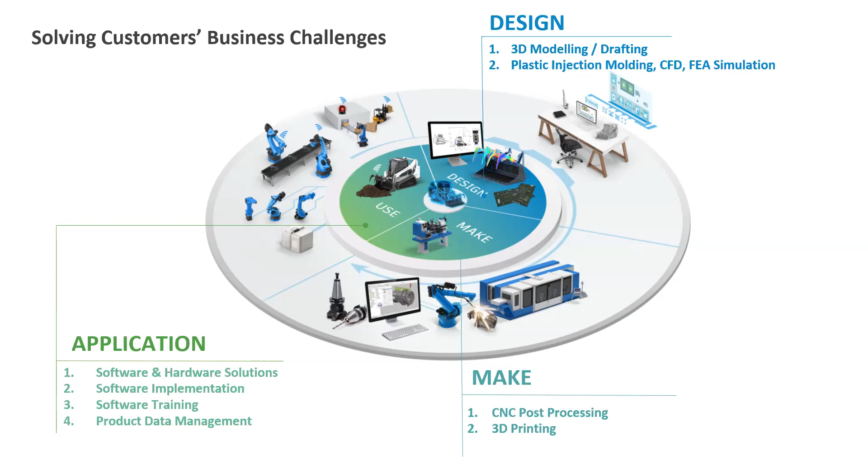So just to show our current clientele over the years, we have expanded, and they are from a wide variety of industries and segments. We have government agencies, institutes of higher learning, research institutes, oil and gas, semiconductor, electronics, plastic injection, and consumer products. This shows that we have been really offering value-driven end-to-end solutions where our customers have been valuing us.

And lastly, next slide please. I'll paste our contact info in the chat box, so you could just copy it accordingly. This is both our sales engineers', myself and Marcus, email contacts, and this is our company's email to show more range of courses and solutions that we provide.

So I'll hand over to our main guest speaker today, Mr. Samsul, he will be delivering the core of the content. Next to you. Okay, thank you. Thanks, thank you Marcus. Hi, good afternoon everyone, so let me share my slide first.

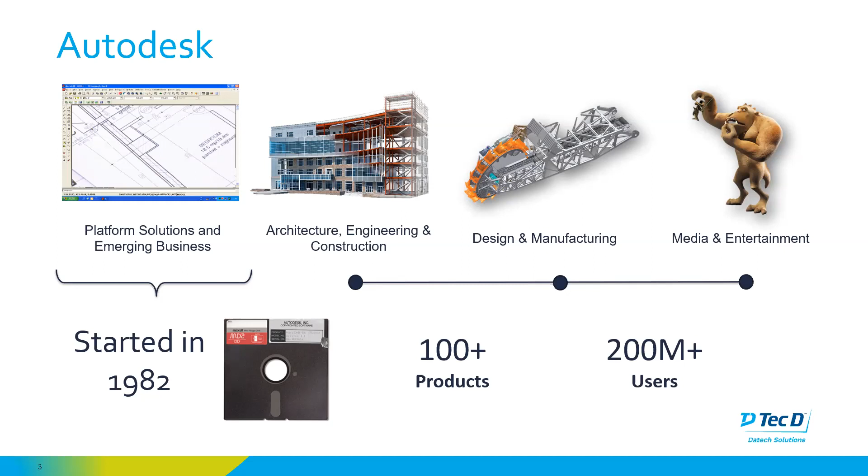Today we see fundamental disruptions in three main areas combining to create a seismic shift in the industry: changes in the means of production and how teams plan, design, create and operate infrastructure assets; changes in the nature of demand for resources; and changes in products as devices, equipment and systems deeply intertwine the physical and digital worlds.

Let's take a closer look. What are the industry challenges in the oil and gas or plant industries? Every business owner wants to win more business, be reliable and efficient, and deliver performance to clients and customers. We want to increase complexity of projects - the demand is increasing in complexity, and we have tight schedules, tight deadlines, and tight costs.

Coming into the new year 2022, material prices are going up, so we have to find out how we can cut costs and meet tight schedules and deadlines. Of course, to cut costs, we need a low cost plant design solution for plant design.

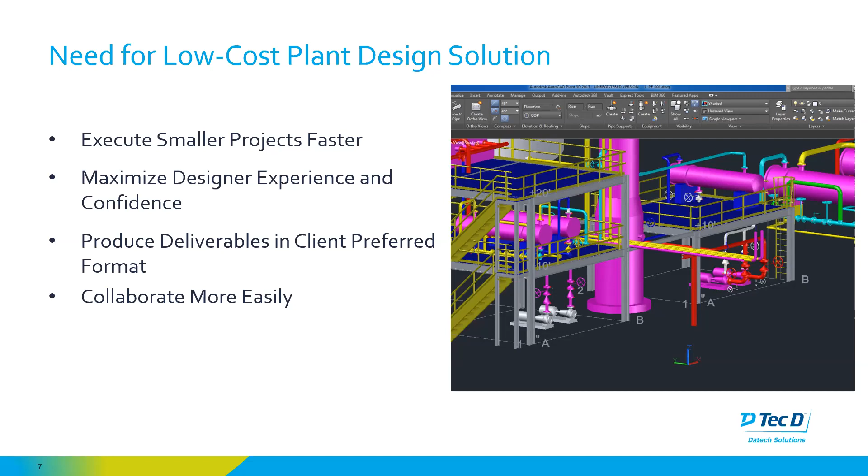This helps designers collaborate more easily. So what are the industry requirements in process plants?

In piping design, besides isogen, would they use piping for mechanical layout? If we provide DWG of piping in plan view etc., would they really use it practically? Sectioning for elevation - the requirements come from process simulation, the process flow diagram (PFD), PID drawings, equipment specification, and so on, all the way to project management. It covers basically everything in the process plant industry.

This is the typical engineering workflow for oil and gas or plant industry. First, we get the 3D or 2D drawing data from the customer or consultant. We start the project by getting all the documents and drawings, then go to project bidding and management, and then engineering. This engineering stage involves a lot of design work. After engineering, we go to procurement and then ERP integration.

In engineering, this is what we focus on - where we can save costs and where we can reduce risk.

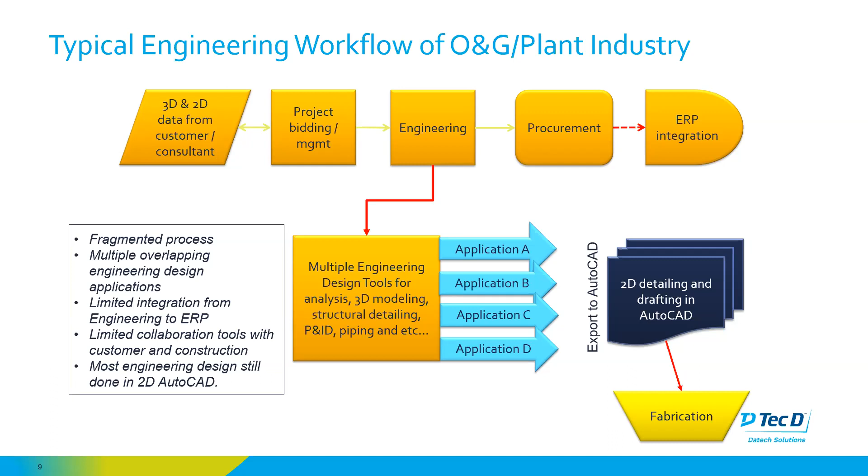So here is the Autodesk solution. The workflow is the same from 3D to project bidding and all, but during the engineering, we are providing only one platform - not one application, actually one platform, the Autodesk platform - to do the 2D drawing, PID, the Plant 3D piping drawing, visualizations, and also stress analysis applications. So under one platform, what is the good thing? It allows the integration between applications to be seamless, because it's all Autodesk, so the interoperability between each software is seamless. The overlapping application problems can be eliminated by using applications from the same platform.

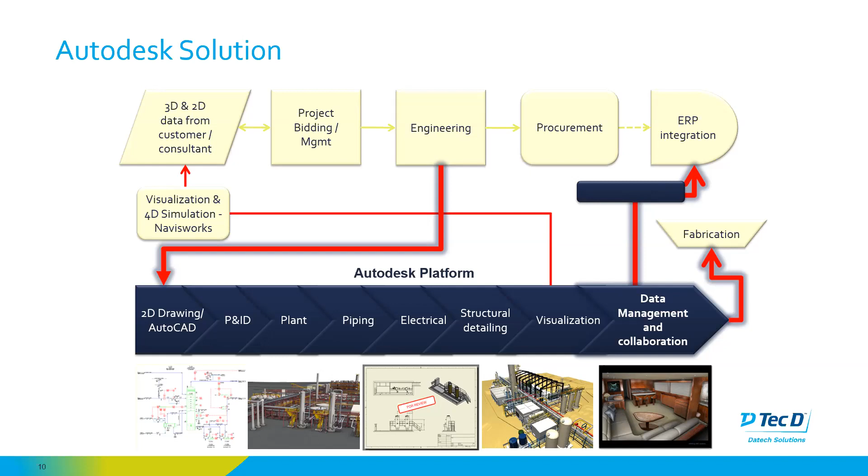So the Autodesk plant design workflow - in plant design, of course everyone needs the PID and drafting drawing, and then we move to Plant 3D. Some of them only stick with PID drawing, not Plant 3D. What's the problem? When you have only 2D PID drawing, you get all the information you want, but you cannot visualize how the plant will work - the height, the length, everything - because in PID it's purely on the spec. And then we go to Plant 3D.

In Plant 3D we have 3D piping and spool drawing, which is the isometric drawing. And then equipment and skid design - this can be done in Inventor, Autodesk Inventor Professional, and of course in Plant 3D itself you can create the equipment drawing as well. But the best way to do the skid drawing and equipment drawing is in Inventor Professional.

And then we go to structural design, structural designing and orthographic drawing - this can be done in Plant 3D. We also have other applications in Autodesk, such as Autodesk Structural Detailing, to do the structural design and detailing. Then for visualization, we go to project review, clash detection, and collaboration in Navisworks Manage. Then we do the map service with AutoCAD Map. So this is the Autodesk plant design workflow - we use all these applications within one platform, the Autodesk platform, to do the whole plant design workflow.

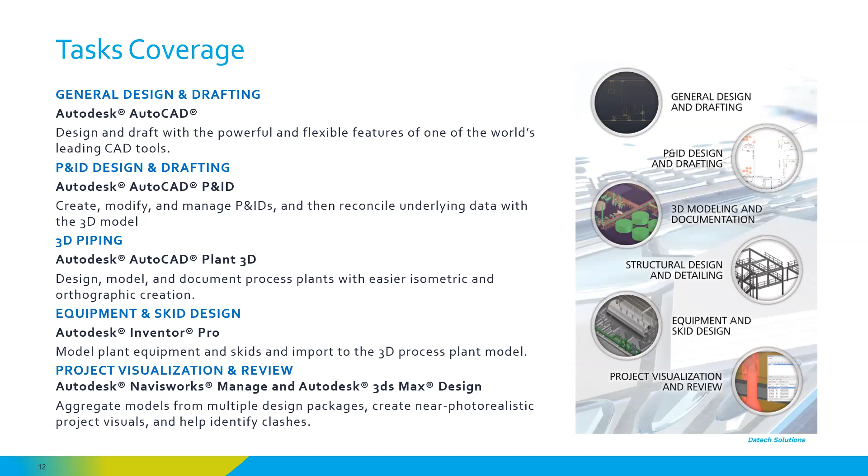So this is the integration between the software. You can see here that our goal is Plant 3D - we want to create a complete plant design in Plant 3D. So with Inventor, you can create a skid drawing and skid design, and export it into Plant 3D with .adsk. ADSK is the Autodesk exchange file - Autodesk has its own exchange file between applications, so it will open the drawing accurately in other applications. And then in AutoCAD Plant 3D, we can export it into DWG, open it in Navisworks, where you do the aggregation of multiple models - the structural, equipments, and pipings.

Then you can do a walkthrough, markups and project collaboration, clash check, and also simulation.

I'm not going to talk about Advance Steel and Revit right now, since it's out of scope for plant design. But a little introduction: Revit is for the AEC industry—architecture, engineering, and construction. But if it's suitable for you, you can use it for drawing and building design of your plant. Advance Steel is for steel detailing and structural detailing.

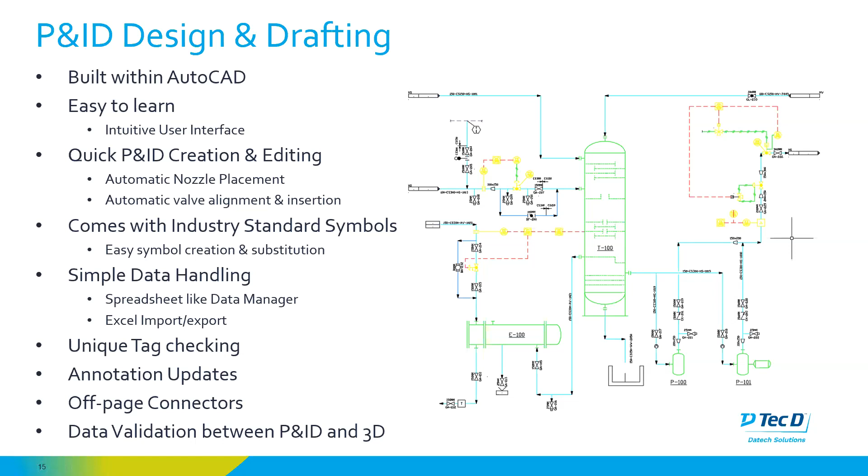So the workflow: we start from P&ID creation, then validate the rules, then go to change management using Excel export and import, and create a report from the management. Then we go from P&ID to piping, which is the 3D—from P&ID we can use it as reference to create our 3D piping.

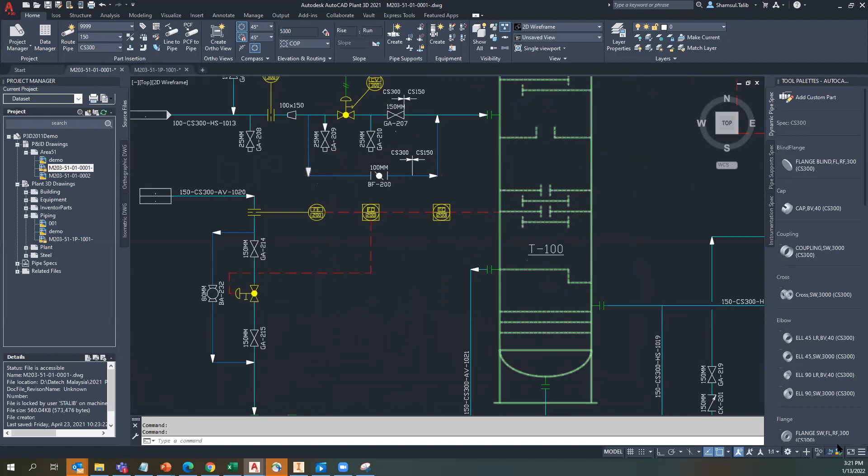So a little bit about P&ID—I'll show you a quick technical demo. This is AutoCAD P&ID. If you see here, it's similar to normal AutoCAD, but it has differences in the tool palettes.

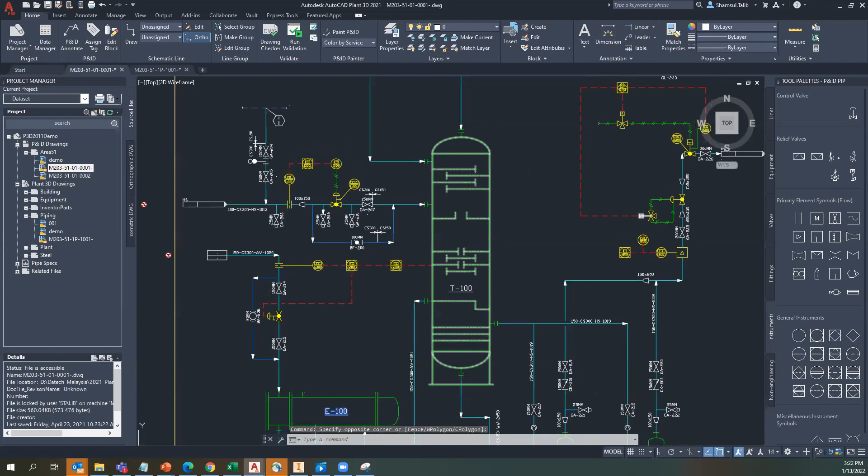So what's best about P&ID? Let me open an empty drawing. I'm going to create or place an equipment into my drawing. What I need to do is just go to—sorry, my Zoom is blocking my view, it's okay, sorry for that—then you can insert it.

For equipment, you just select from the tool palette, place the equipment, and it will show the assigned tag. This is the unique tag assignment—you put your number in, let's say 2222. This tag number is unique; you cannot repeat the number. So set it as the equipment tag, assign it, then put the annotation there. When you place a block or equipment, it immediately gets the annotation as well.

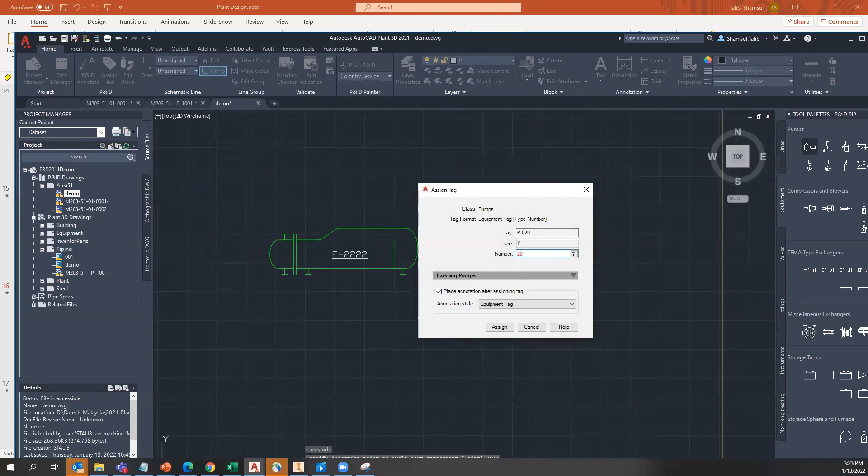When I add another part, for example I want to add a pump, I add a standard pump, say number 2022, and put the annotation down there. Now I want to connect the vessel to the pump, so I create the pipelines. Why do we use pipelines instead of normal lines in AutoCAD? Because the pipeline feature already has an arrow built in. Then when I connect it here—oops, sorry.

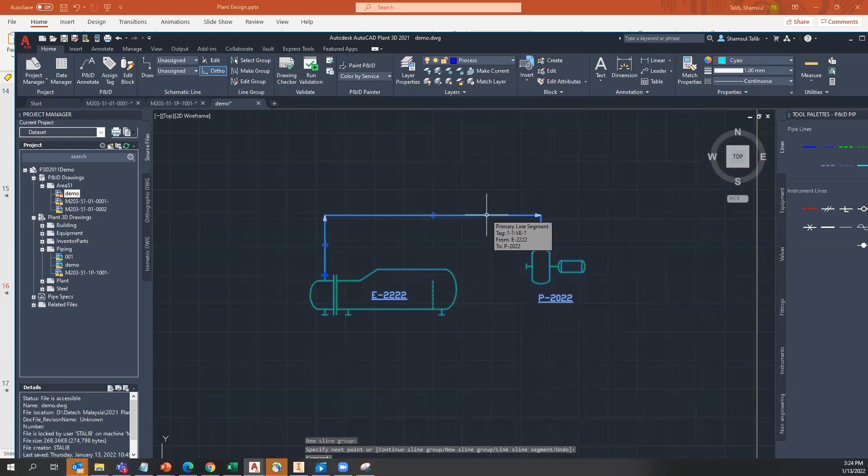When I connect the pipe, this is not a normal line - see, there's an assign tag. With the assign tag, you can directly set the size. For example, I'm going to set 150. The spec is carbon steel 150.

Pipeline group, you can choose from the various selections here - which type of pipeline group service you are drawing. For example, I'm going to show this general process, and then the group, line group. Same goes to the equipment.

You can also make the annotation directly when you assign the tag. So assign, then I put the tag down here.

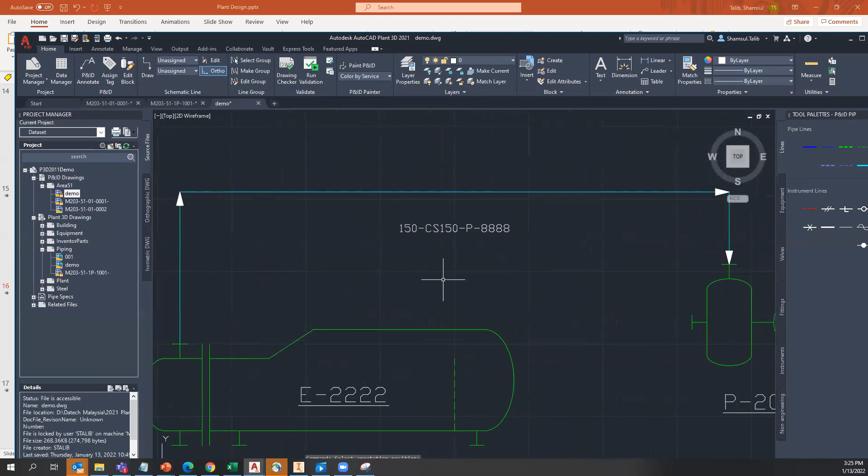Next I'm going to add some valves into the pipe. Now I can see here, this is my tag number. I have a 150 spec size, CS 150, general process P, and the line number.

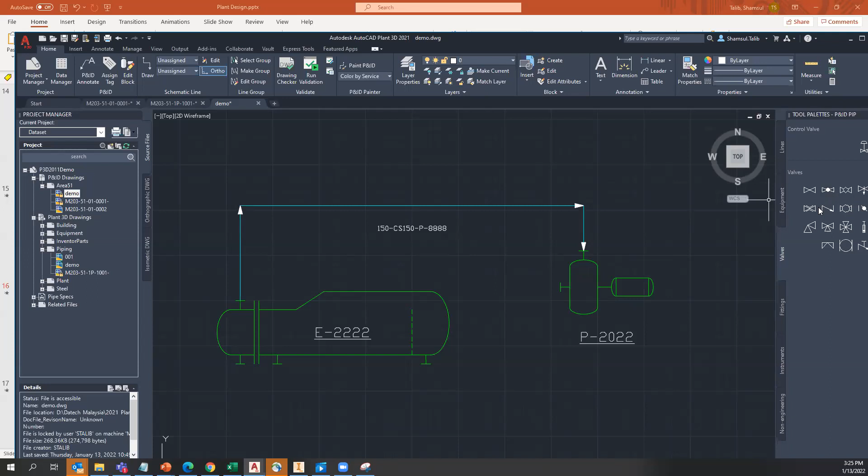When I add a valve, for example a gate valve, I just place it here. You see the line is continuous - when I place it, it automatically trims the line and puts in the tag. So you don't need to do double work to trim everything.

Even if you move it to the other place, the previous place is already continuous, and this one is already trimmed.

Next I'm going to add one more check valve here. It has the size automatically because it reads the pipe size.

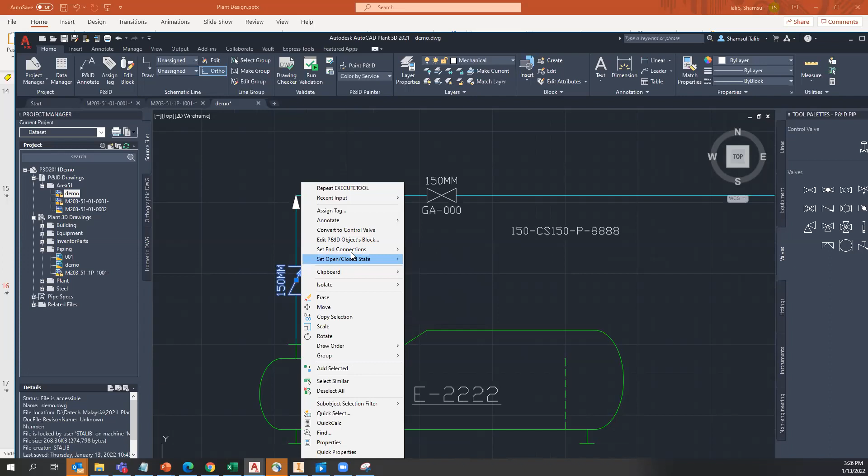I can even change the behavior of the valve - either normally open, normally closed, or others. So set end connection, and then I can change the flow of the valve just by clicking here.

If you wanted to change the valve type, just click the button here because it's already preset and provided by Autodesk. Then you can choose which valve type you want to use. Let's say I'm going to change to ball valve - it's easy, it's direct.

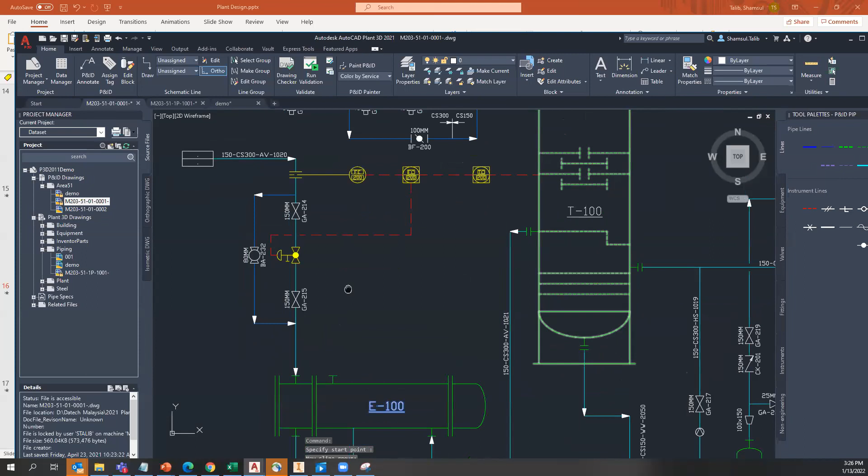I'll do a little more example here, adding more valves. When I connect this vessel to this tank, I just click here and then click to the tank. What happens is when it connects to the tank, it automatically adds a nozzle, because logically every pipeline that connects to the tank should connect to a nozzle.

Also, the overlapping lines or overlapping pipe will be trimmed as well. So that's P&ID - everything you draw inside your P&ID design.

You can get all the information, the table, the BOM list, the part list, inside the data manager. You can filter it by engineering items - either you want only equipment, only pumps, only tanks, or the whole engineering items report or BOM list.

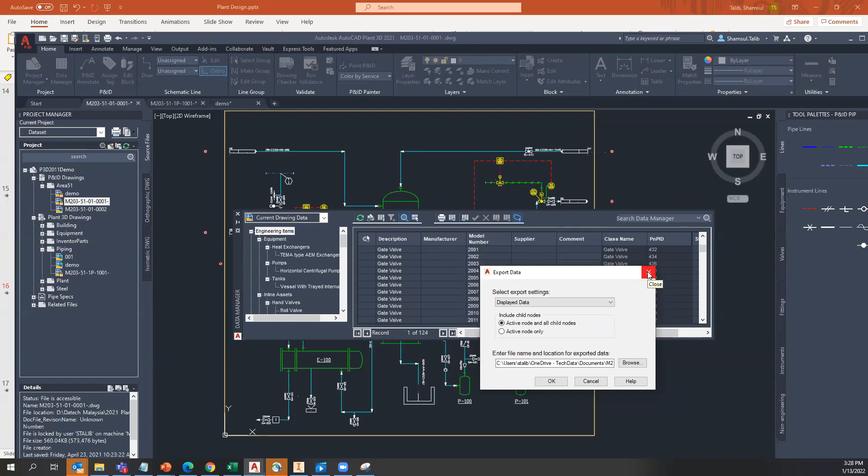These engineering items in the data manager can be exported into an Excel file - select where you want to save it and save. When you save it into Excel, any changes you've done in the Excel file can be re-imported and it will synchronize the file.

For example, you add supplier name, comment name here. Let's say the designer doesn't know the supplier or manufacturer name, so they export it to Excel and send it to procurement. Procurement fills up everything and sends it back to the designer, then you can update it in your drawings.

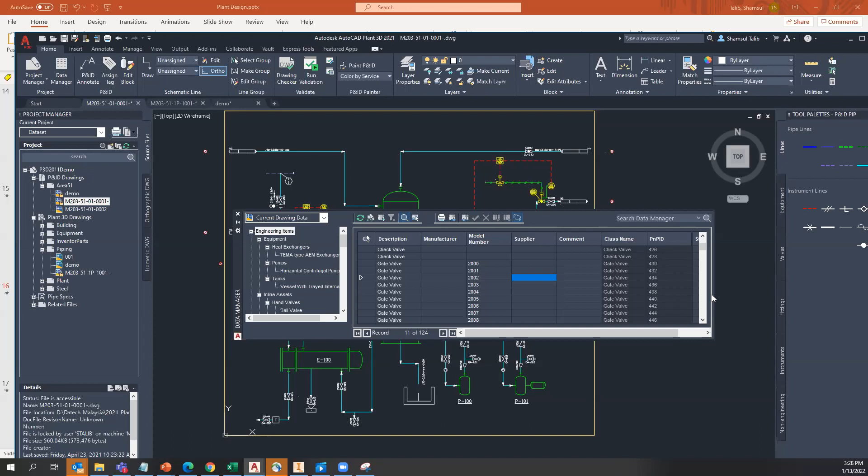When you open here, there's a lot of parts, and you don't know which one is which - for example, the gate valve 2001, you don't know where it's located in the drawing. So what you do is click the gate valve and click visualize, and it will show the location, highlighting each valve.

Same goes for the pump - what else can I show? Assume nozzles, this one - I just click the item. Oh, this one is assumed, it's not available here. Let's say this one - E100 is here. So it's easy for you to navigate throughout your drawing.

So this is about PNID. On the left here we have the project files - every drawing created in this project will be stored in one folder. That makes your project data management easier - it will not be stored in different places because the project cannot read it otherwise. It will show an error that it cannot read the file outside of the project folder.

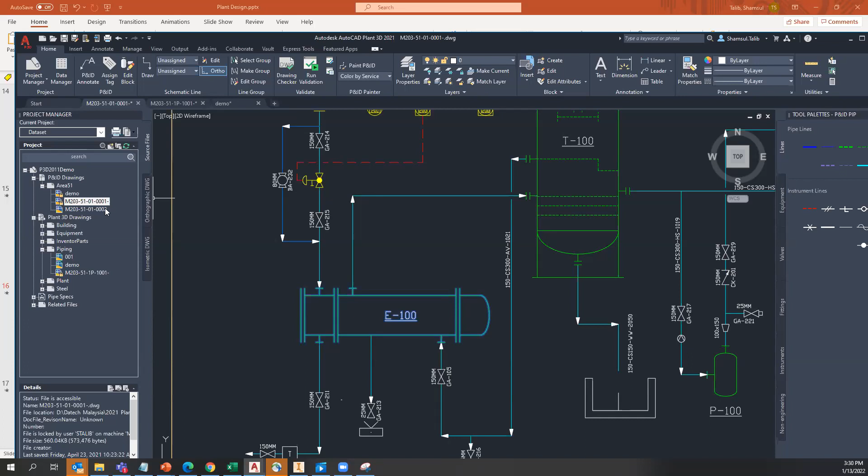From the PNID, the line list - this is not only the tag. This tag will be useful during the piping, the 3D piping creation later. You have already determined everything in the pipeline, then you can use this pipeline in your 3D piping creation. That's about the PNID, you can explore more later, but that's not all - that's what I'm going to show you right now.

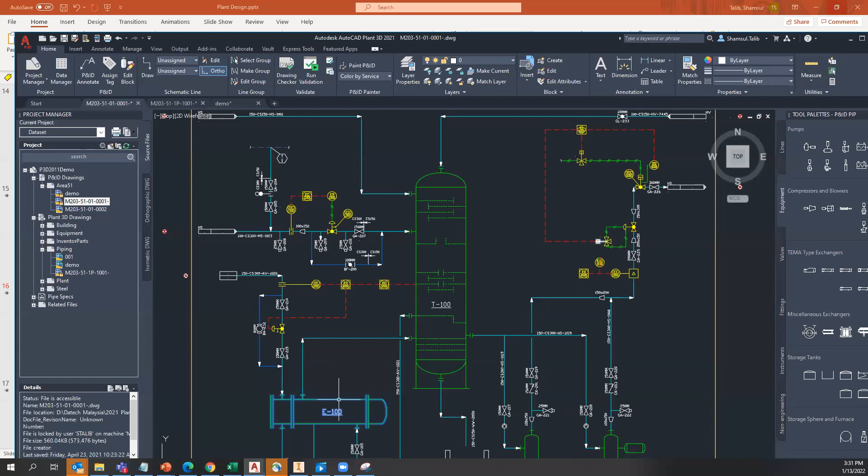So I'm going to move to the skid drawing - that's the 3D drawing, sorry. Okay, so this is the PNID.

Next is the P&ID to piping design workflow. This is the P&ID line list that I just mentioned earlier - the pipeline tag is not just a tag, it will be useful. So in Plant 3D, you will have the P&ID line list. This is for you to get the reference to do the 3D piping, so that you will not miss anything, or get the wrong line number during the 3D creation.

And then we go to the 3D drawing, which is the spec-driven piping, because all the piping created in Plant 3D is spec-driven. Then we go to the GA general arrangement drawing, then we go to clash checks.

From the orthographic drawing, the GA drawings, then we go to clash check using Navisworks or visualization, so that we can create the isometrics for construction. This is the most important thing needed for construction, because these are the final drawings for construction. So we do PID, Plant 3D, orthographic, and then finally we need the isometric drawings.

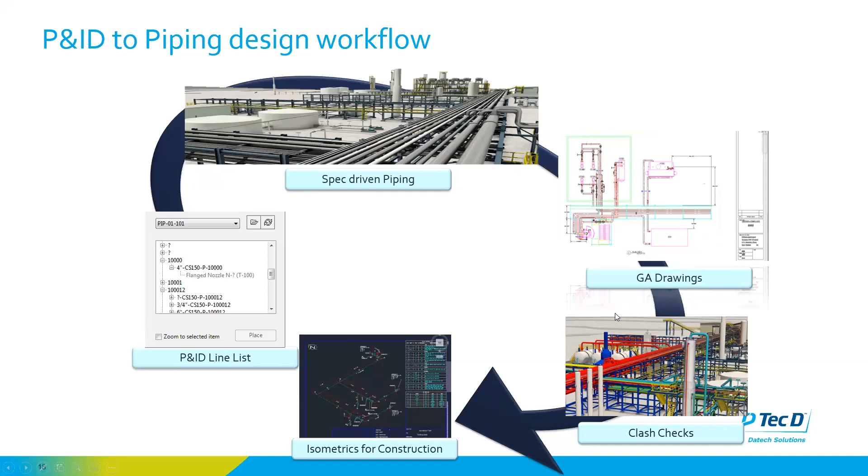So the structural modeling - AutoCAD Plant 3D also has the structure creation feature, because you can create structural modeling faster with all the structure standard catalogs available in Plant 3D. There are a lot of types of stairs available for stair creation, the platforms, as well as the ladders. This structure drawing created in Plant 3D can be exported to other applications for steel detailing or steel analysis, via the SDNF, which is the steel detailing neutral file.

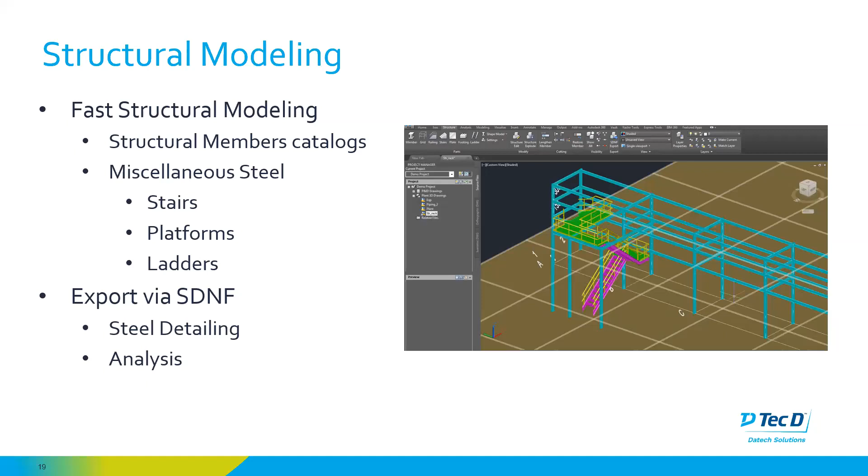Next is the equipment design. A powerful tool that Autodesk provides for part and assembly drawing is Autodesk Inventor. So what are the benefits that plant designers and equipment suppliers can get with Inventor? For plant designers, you can work better with the equipment drawings from the supplier. You can use their design data from suppliers directly and efficiently if the design data is using Inventor as well. The most important thing is to reduce plant design error possibilities and also react faster to any design changes.

I will show you a short video of how this equipment design change can be done in a few seconds. So for the supplier, you can take full advantage.

You can design the equipment, taking full advantage of a highly efficient mechanical CAD system. You can design the equipment in Plant 3D itself, but of course normally the piping designer doesn't do the equipment design, right? So normally we get the 3D drawing from the supplier for the equipment design. The file format you got from the supplier needs to be brought into the drawing, so you can convert it into Autodesk Inventor and then import it into Autodesk Plant 3D.

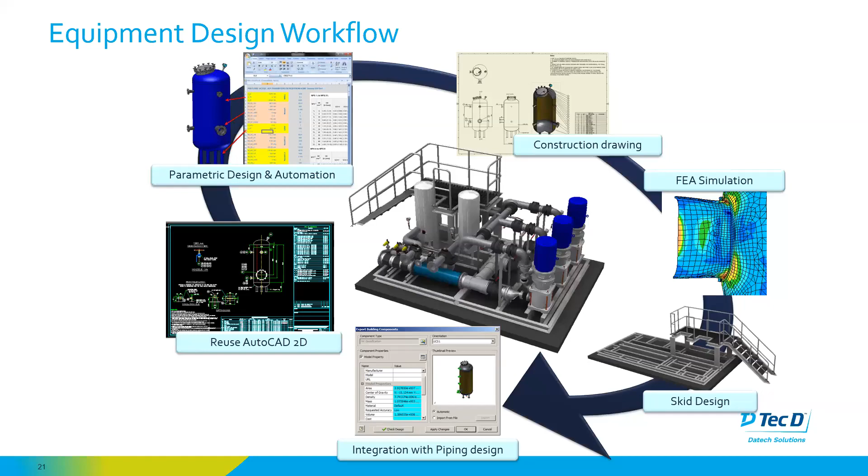And then we go to the skid design - we create a platform, put all the materials, put all the equipment and connections, and then we integrate it with the piping design. This is the equipment design workflow, and this is why I said earlier that the designer can react faster.

That means you don't need to do every part modification. What you need to do is just change the size of the vessel. One click, one change, everything is changed as well, so you don't have to do double or triple work. Of course, this comes with a few settings that you need to configure beforehand, but it's very simple to configure.

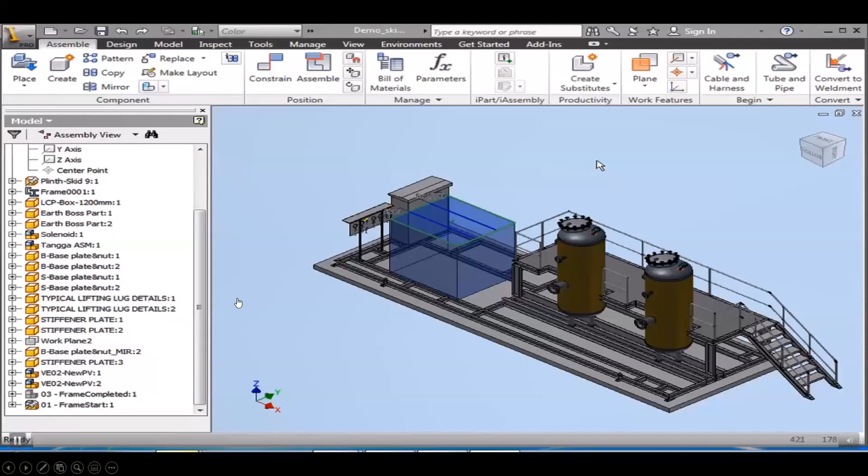So for skid design, the frame design, frame analysis, and automated material takeoff can be done in Autodesk Inventor. You can create the skid design accurately with the material library available. The material library in Inventor allows you to choose from various types of standards or families. You can easily design the frame by just choosing what type of frame you need, and connect each frame with the connection setting.

So the structure created in Inventor, of course, needs to be analyzed, because you don't know the strength of your design structure. So once the design of the structure is completed, then you can run it.

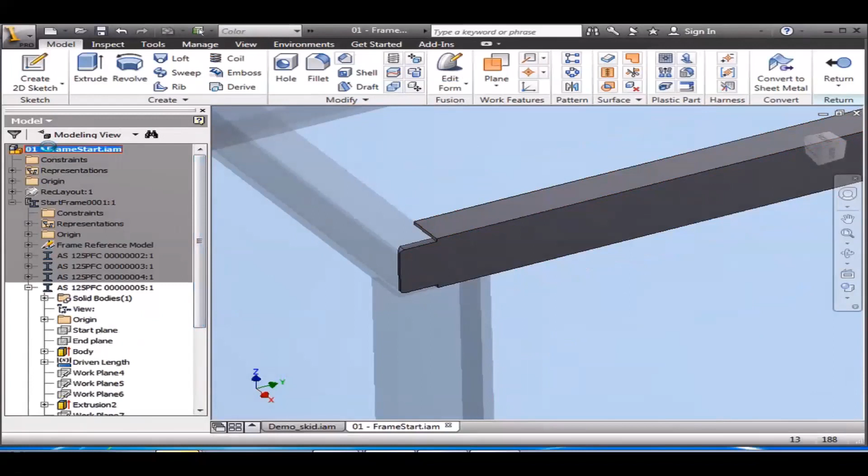This is the connection setting. You can set the connection, then run the simulation, the static or modal analysis. Choose which beam properties, apply the stress, apply the load, and then you can run the simulation.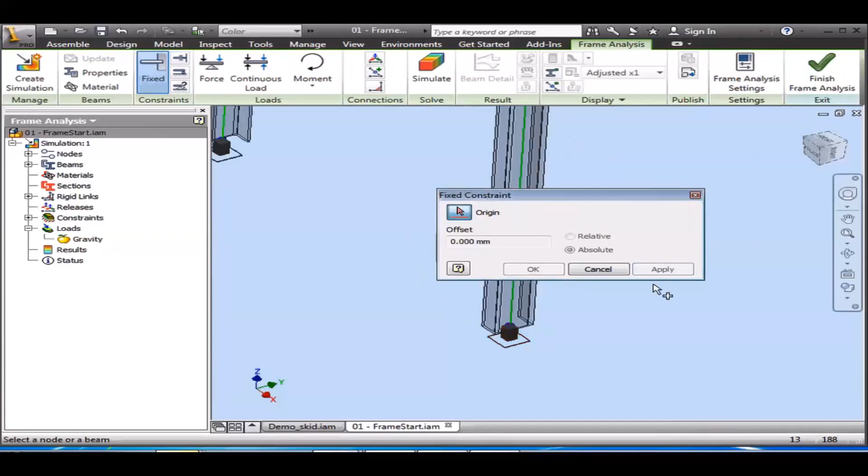So once the design is confirmed, when you've already run the simulation and got the approval that the design is strong enough, then you can proceed with the shop drawing, which is the orthographic drawing, of course.

So I'm skipping a bit. This is the orthographic drawing, the shop drawing, to send to the fabricators to fabricate the structure.

So next is 3D piping in AutoCAD Plant 3D. We do the skid design in Inventor, and then do the 3D piping in Plant 3D. Why do we do the skid design or equipment design in Inventor? Because Inventor is a specialized tool specifically for part design, for skid design, so that's why we don't do it in AutoCAD Plant 3D. In Plant 3D you can build the structure yourself, but there's no simulation test. If you need simulation test or stress analysis, you have to export it into other applications such as Autodesk Nastran, or go back to Inventor to do the stress analysis.

So in 3D piping, the piping creation in Plant 3D is spec driven. It all depends on the spec you choose. You will always attach to the spec when creating the piping, so that you will not miss or mistake the piping between specs. The piping modeling is pretty easy, and editing or modifying the drawing is also easy. The automated pipe routing feature helps you with the designing ideas.

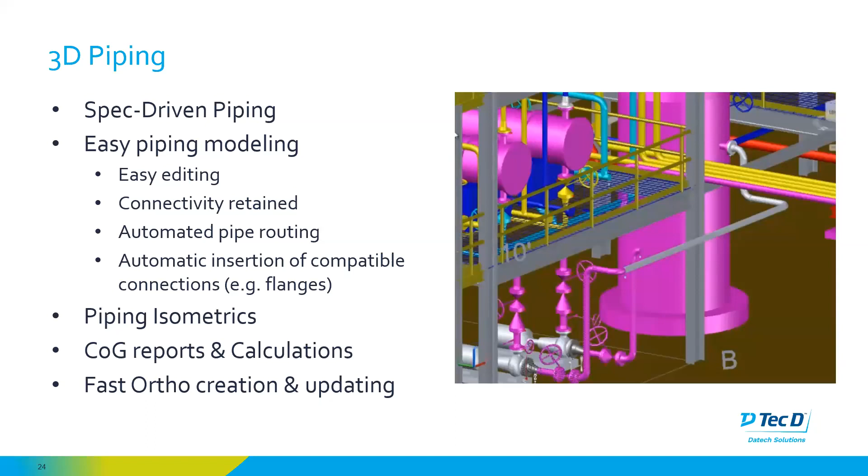And then a spool and isometric drawing can also be created with all the BOM lists and all the information needed. So this is an example of 3D piping videos. I think I'll show you a little demo on Autodesk Plant 3D and Inventor.

All right, first let's go back to Inventor. So this is the skid drawing that I have created earlier. This file can be exported to AutoCAD Plant 3D. In the environment, we have BIM Content, and with BIM Content we can export building components. What I've already done here is export it into a .adsk file, which is the Autodesk Exchange file.

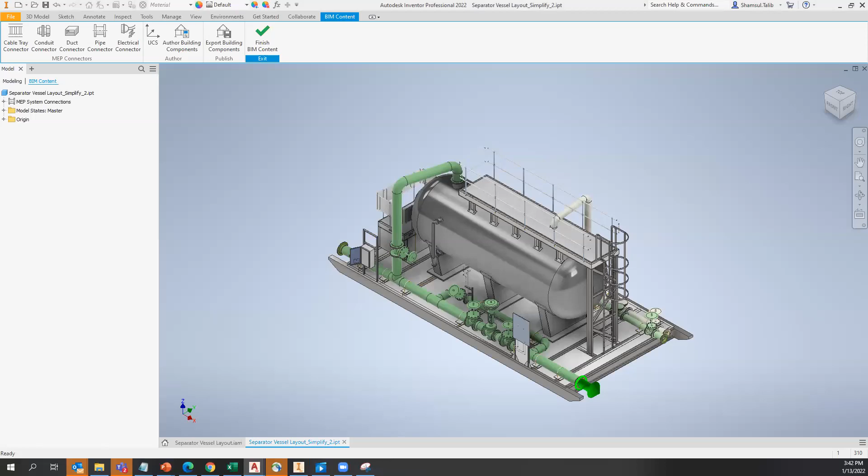Then when I export it, I save it as an ADSK file, and I can open and import it in Plant 3D. So this is in Inventor, from Inventor, and then I go to Plant 3D. For example, this one - with a few clicks, I can already import the skid design file into my Plant 3D drawing. Let me change the environment first.

Okay, 3D piping. There are multiple options you can choose for the tool palettes and for the environment. There's 3D piping, P&ID PIP, or you can use the ISO standard, ISA standard, or DIN. You can choose between these standards.

So in 3D piping, what I'm going to do is import the equipment from Inventor. I'll convert the Inventor equipment, choose import, then choose the part I already created earlier, open it, and place it into the drawing. I think I chose the wrong one because that one is pretty big.

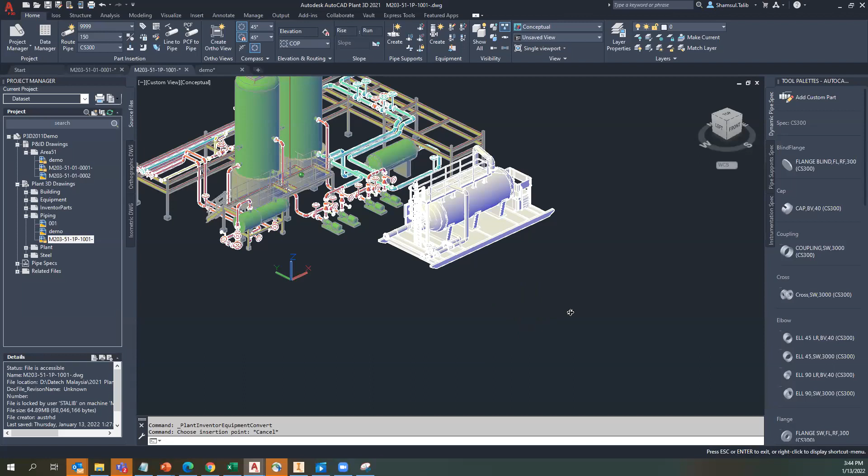In Inventor, before you export it into a .adsk file, you can simplify the drawing. That means smaller details like screws and nuts aren't included, because you don't need that in Plant 3D. All those small parts are only needed in Inventor and by the manufacturer, not in Plant 3D. So we can simplify the drawing and put it into Plant 3D to do the drawing better and simpler.

So on the equipment in Plant 3D, you can see these are actually the XREFs, the external references, that different disciplines create separately. So what we do is get the equipment drawing and the structure drawing, and combine them into one drawing.

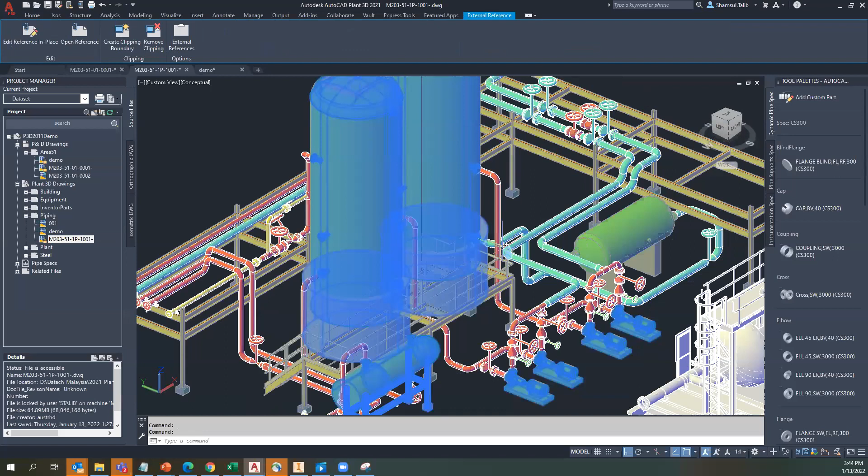In the piping drawing, since the final drawing is normally either the piping drawing or the plan drawing, the piping drawing will need the equipment and also the structure, because how do you do the piping drawing without the equipment? How do you connect it, right?

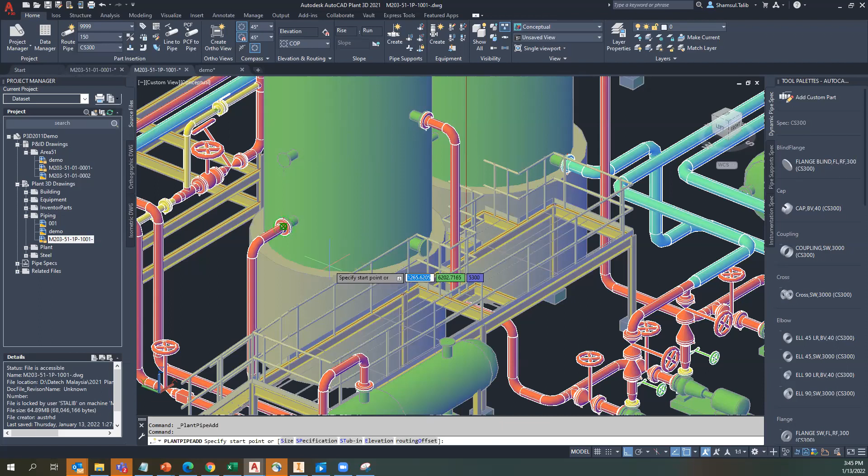So here's the 3D piping creation. For example, this is the spec, the CS300 available here. As you can see, there's a spec editor where you can create your own spec. For this, I'm using CS300, and I'm going to route a pipe from a vessel to a tank.

Oops, got the wrong spec. Sorry. Okay, coming back to the skid design I just imported - when you import the skid design, it also reads the connections on the drawing. This connection was created in Inventor, but once you import it into Plant 3D, the connection is already there.

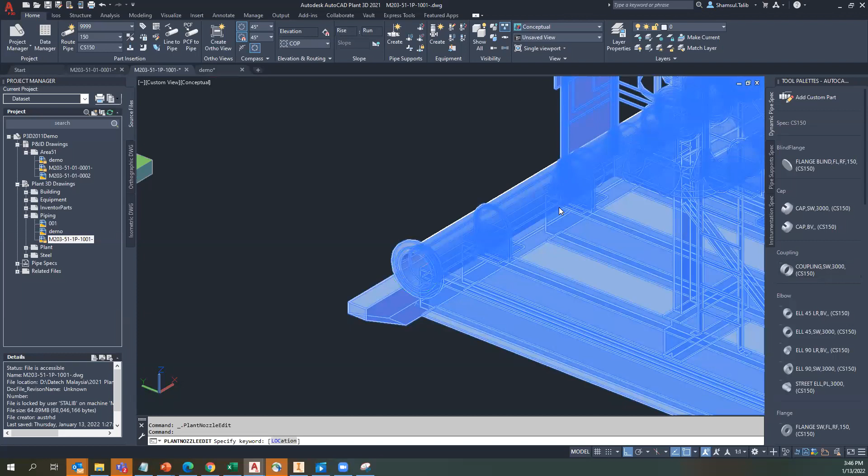So what you need to do is just select the suitable nozzle for that connection, and then you can already create the pipe.

Oops, guess I need to re-import it - there was some error I made earlier, sorry for that. I'll reopen the drawing first.

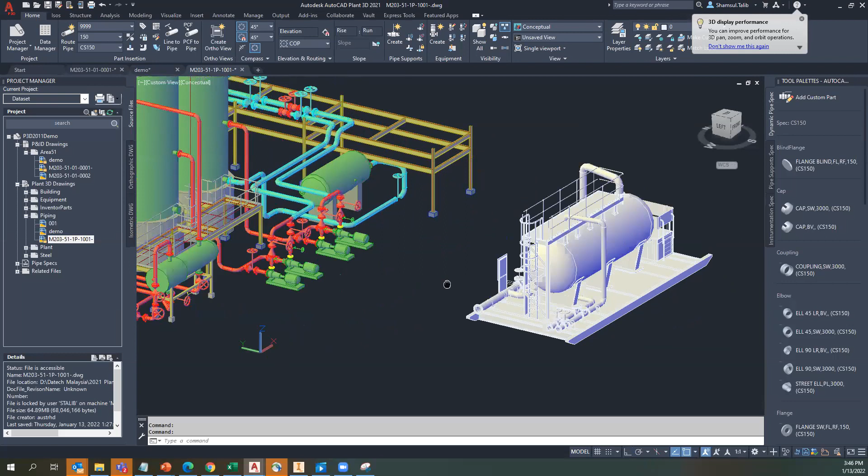So, for example, I need to reconfigure it - the zoom, or you can toggle it here. Then you can see the properties. So when you select it, you can change the properties of the nozzle.

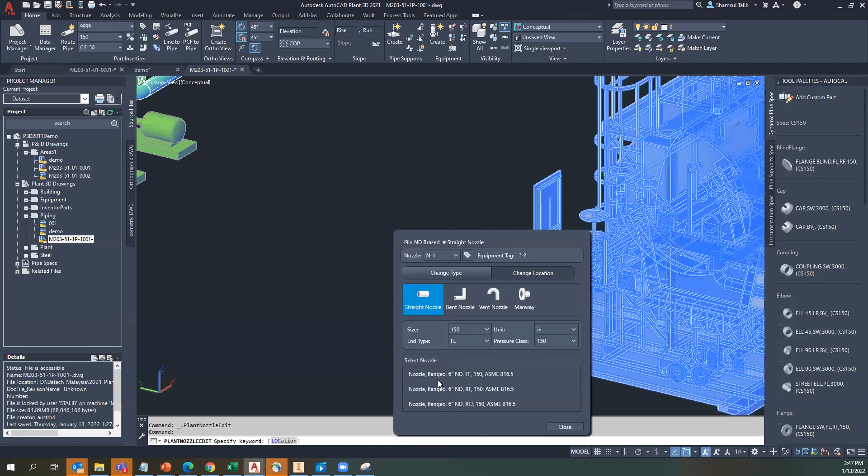What is the pressure class? What is the end type? The units. Let's say I'm changing it to 150. Then you can select which nozzle you want to use, and start. So you see, when I change the nozzle, it's already automatically created at the connection.

So what I need to do is just route the pipe. For example, here, move it here, then move it to the other side - 4,000 to the other side. I wanted to connect it to this pipe.

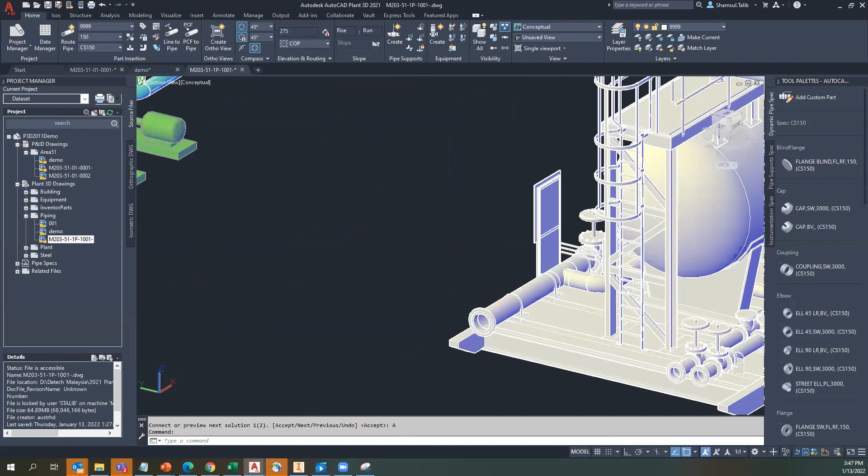So when I stop here, I just connect it to the pipe. Oops, this will try to connect - see, there's automatic routing. You can either choose the connection, a different connection. Sorry, let me do it again.

Here, and it connects here. When I connect it here, there are multiple options available - either this one directly changes here, or this one. So which one is better for you? Then you can click accept to take the suggestion.

Other than that, you can also add pipe supports. Of course the pipe needs pipe supports in order to hold it, so the pipe support feature is also available.

All the standards are available. There's a lot of items, a library in Plant 3D, so you don't need to draw it yourself. You just have to choose which one is suitable for you.

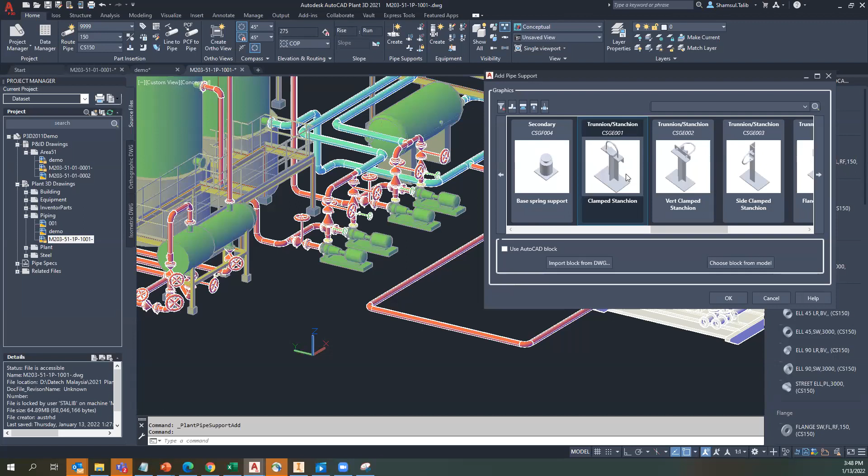You can choose from clamped stanchion, then place it. You can see this is very intelligent, it reads the pipe diameter, so it will put the size, sorry, the support accordingly. What you need to do is just place it where you want it to be.

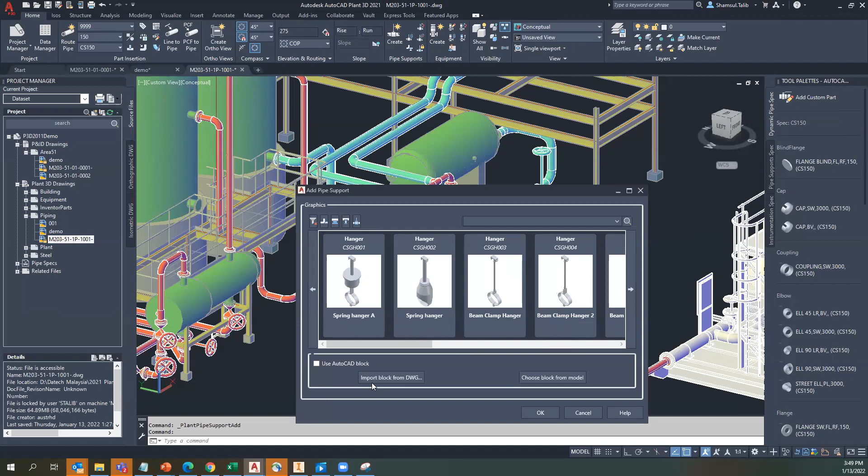I have already put all the supports here. There's also multiple types of pipe supports you can choose from: dummy legs, shoes, anchors or guides, the base support or hangers. There's a lot of standards. Or if you have your own supports, you can import the block from AutoCAD.

So that's about the piping in Plant 3D. In Plant 3D, there's a nozzle, I'll show you a little bit. I think I have another 10 minutes, so I have to move faster.

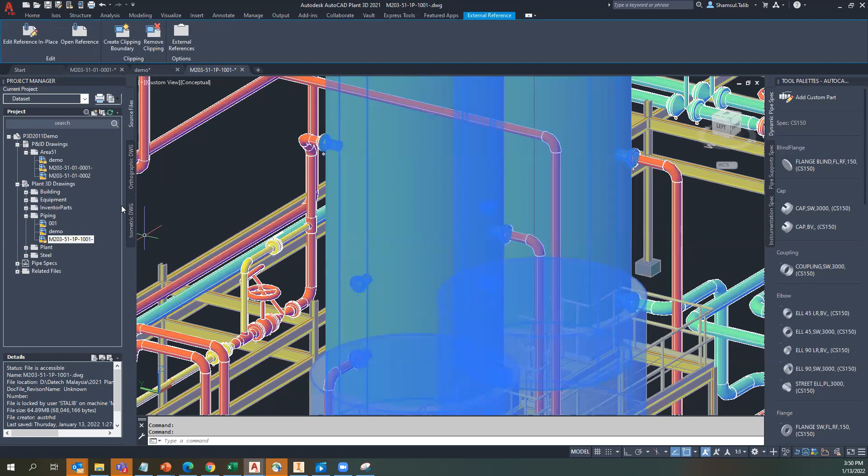In orthographic drawing, once everything is completed, you need to produce the orthographic and isometric drawing. For orthographic drawing, what you need to do is go to orthographic drawing, then demo. There's already a template there, but if you have your own template, you can always change it in your project setup. I wanted to create a new view on the orthographic drawing.

Hold on a second. Oh sorry, it was in a different screen. So I wanted to do the piping orthographic drawing. Select the drawing.

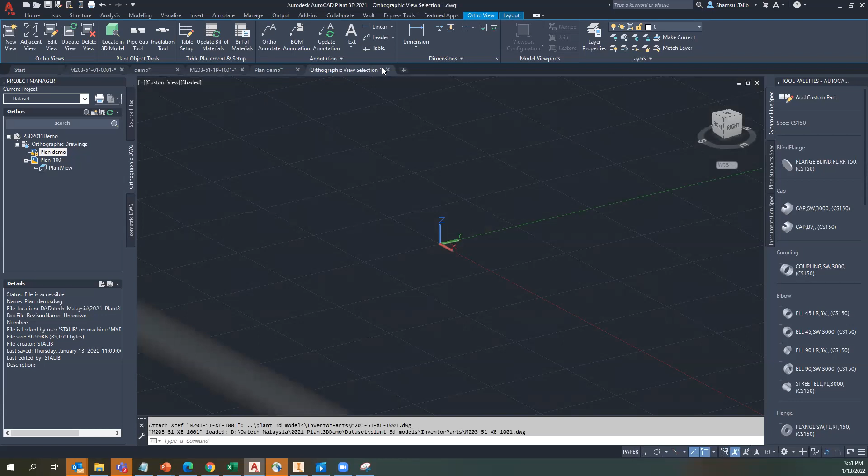So these boxes are actually what will be included in your orthographic drawing. This is the front view, so I'm going to change to top view. The red one indicates which view you are getting, so this is the top view I'm getting. Then everything included, you can check from the orientation - everything's included in the box. So I just click OK.

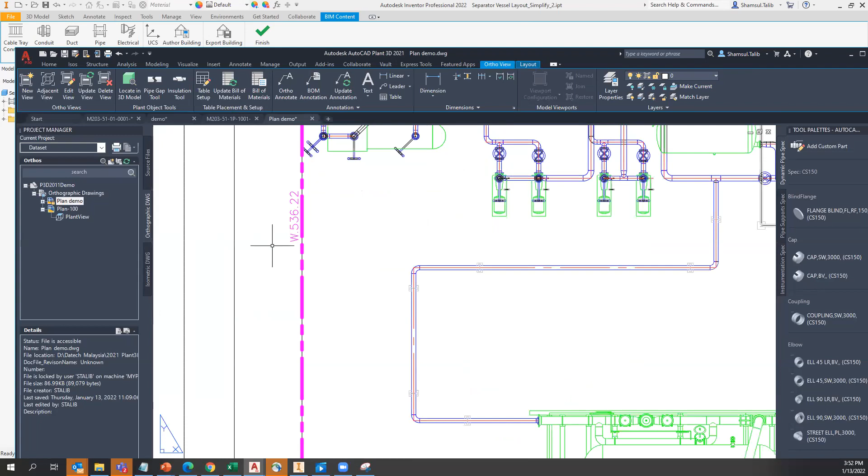Then the 2D orthographic drawing will be created. This is the top view. You will even have the coordinates of the drawing, right? So from here you can get the adjacent view.

Say from here I want to get the front view. I click front, then I just put it into the drawing. Adjacent view here, front. Okay, oops.

All right, so next is another adjacent view, the isometric view. It's like the adjacent view - select the drawing, I go to southwest isometric. Now I got the isometric view of the drawing. This is about the orthographic.

So the next one, the most important thing is the isometric drawing. This is for the orthographic drawing, and I'm going to do the isometric drawing. Sorry, my screen is so small.

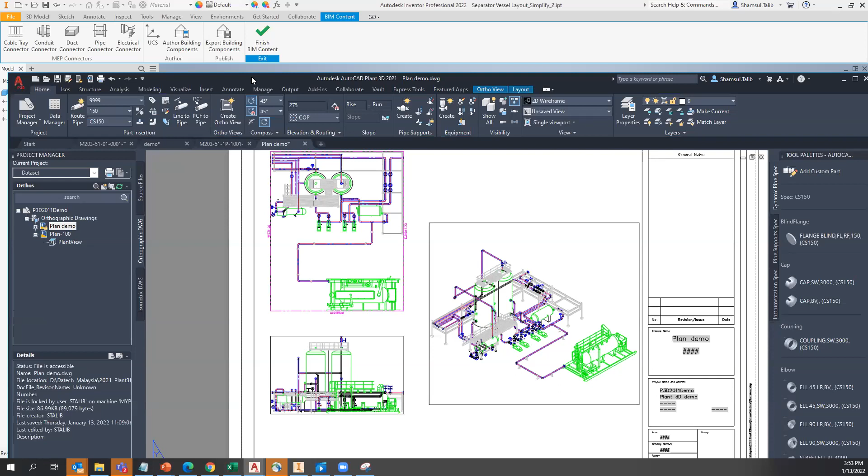So to create an ISO drawing, all I have to do is select on ISO. All the pipelines available in your drawing will be listed here, so you just choose which pipeline you wanted to do the isometric drawing for. Select the settings - there's a few settings you can set beforehand, then click create.

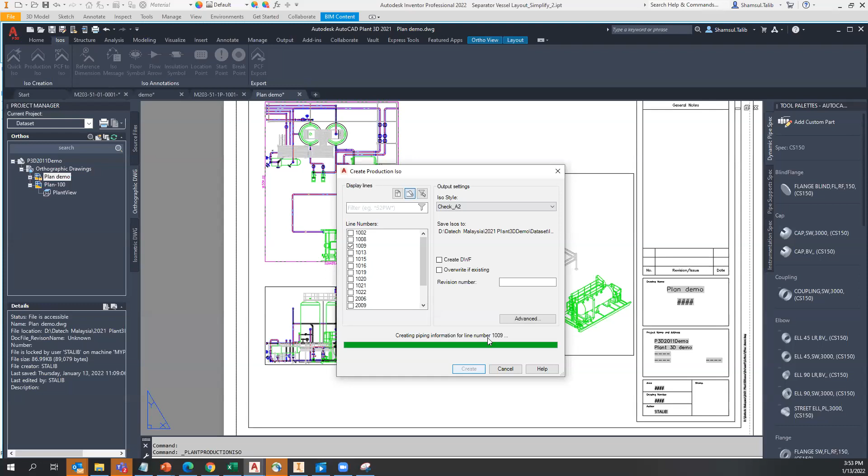Then the isometric drawing is created in the background. So you don't have to do the isometric drawing yourself anymore, because this isometric drawing is created based on your 3D piping drawing.

Once it's finished, the isometric drawing created will show down here that it has been finished or created. Then you can open the drawing. See, isometric creation completed, then you can open it.

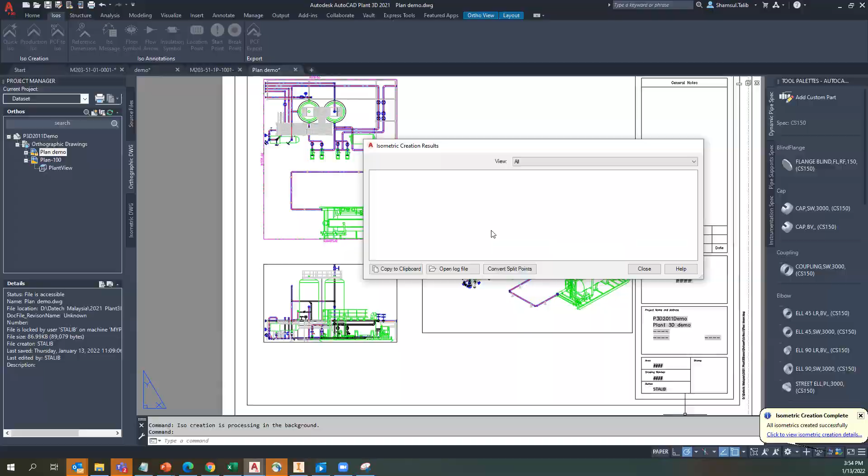There are 3 drawings. Why 3 drawings? Because it actually has 3 separate drawings, because the line is pretty big, so it separates into 3 drawings.

You can see all the information you need in the isometric drawing - all the connections, all the sizes, the items, continue from which drawing is listed in the isometric drawing. It even has the bill of material for each pipeline or each drawing, so you can get it directly from the 3D drawing - you don't have to create this yourself anymore. So this is about isometric drawing, and I forgot to show about the 3D drawing earlier.

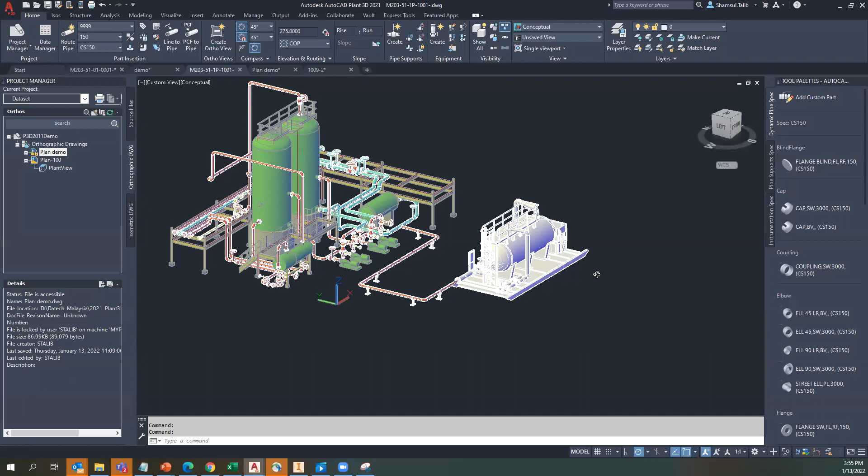When you create a 3D drawing, based on P&ID there's an option that you can create the pipe drawing based on your P&ID line list. What you have to do is just click on the P&ID line list, and there will be the list of pipelines that you previously created in P&ID. When you open the P&ID line list, you can select it from here.

For example, there's line number 1009. What are the spec, what are the size? You just click place item, then you can already place the item. This is just an example I'm going to do.

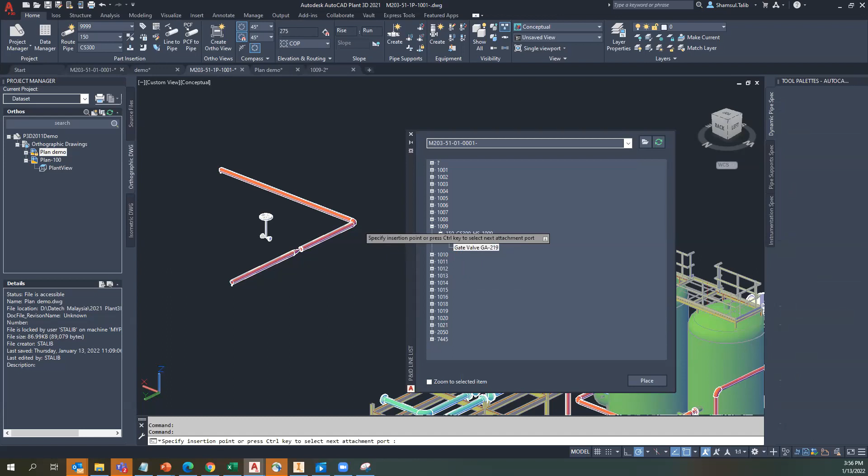What's inside the pipeline? One check valve and one gate valve. Just right click and place the item here, and it will place accordingly. Same goes for the gate valve, just select it and then select the orientation. Then I got a pipeline. When I select this one and check the properties, there's already the pipe layer, line name, line tag is 1009, so I don't have to create from scratch and redo the tag.

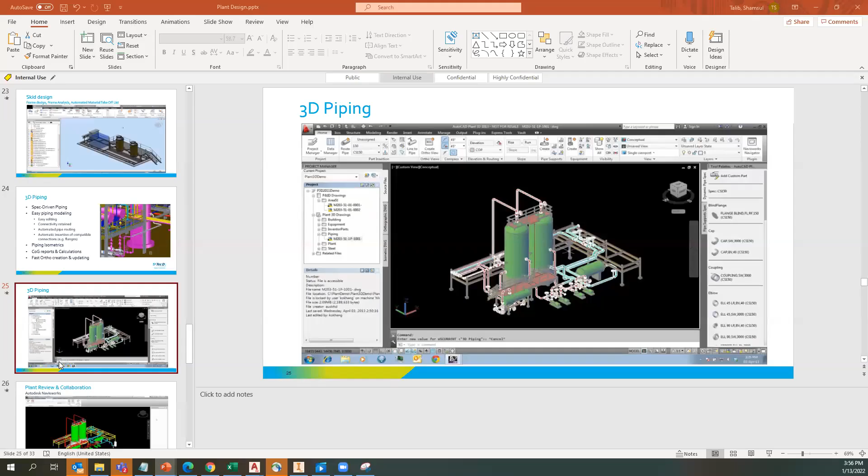So the last one will be the visualization. I got another 4-5 minutes. So the final drawing that you have already designed, that includes everything from the structure, from the equipments and piping, can be easily exported into Navisworks.

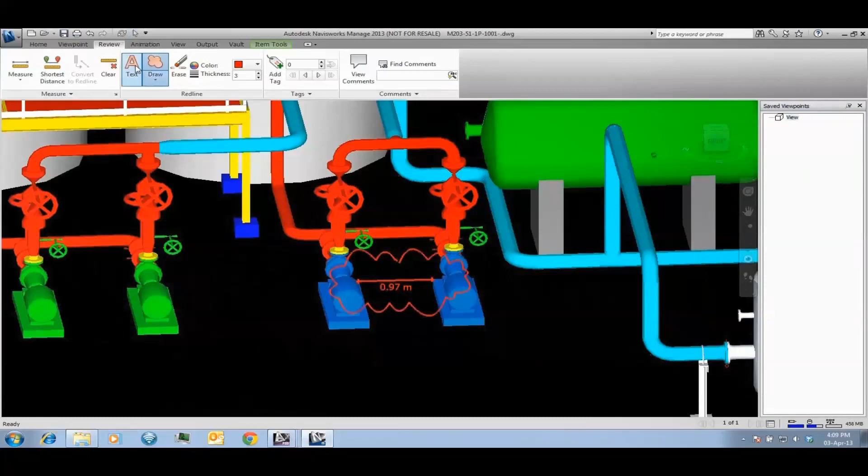Navisworks is where you do the design collaboration, also the clash test. You can even check the measurement of each item. This is for the reviewer to see whether this design is designed accordingly or not. You can add notes into the drawing for the designer to have a look at when it needs to be changed.

Then you can run the clash test. The clash test is either from one part to another part or the whole project, so you can see all the clashes that occur on the design. The design can also be highlighted by just clicking it, and then you can see there's a clash between the valve and the structure, so that you can modify it accordingly.

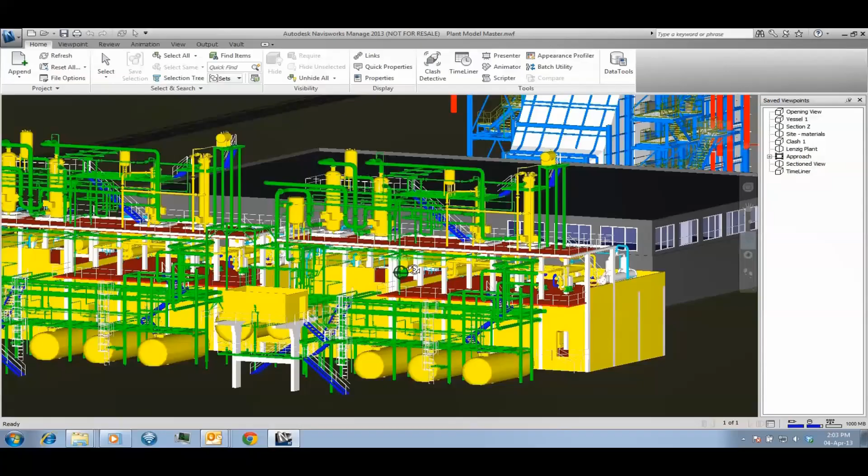Other than that, you can set a view, the viewpoint, and you can save the viewpoint. You can create an animation of the view in order for you to do the presentation for the final project drawings or project design.

Other than that, you can run the analysis, the visualization, and then you have the ability to walk through in your design. Sometimes we design, but we cannot visualize whether that space is enough or not for a human to walk through. So you can put a third person here, and then you can walk through into the design.

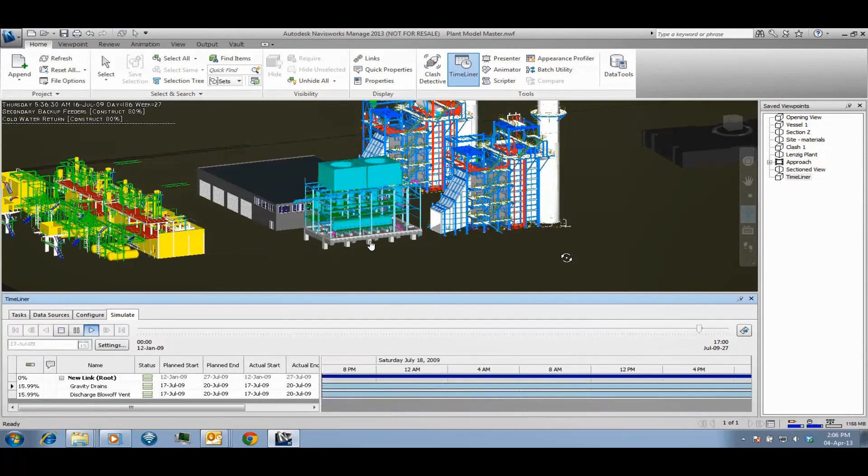You can import the schedule from Microsoft Project or Primavera into Navisworks and do the scheduling here. You can set the actual date or the planned date, and then you can see the progress on a specific date. So from the simulation of the schedule, you can create an animation on the progress.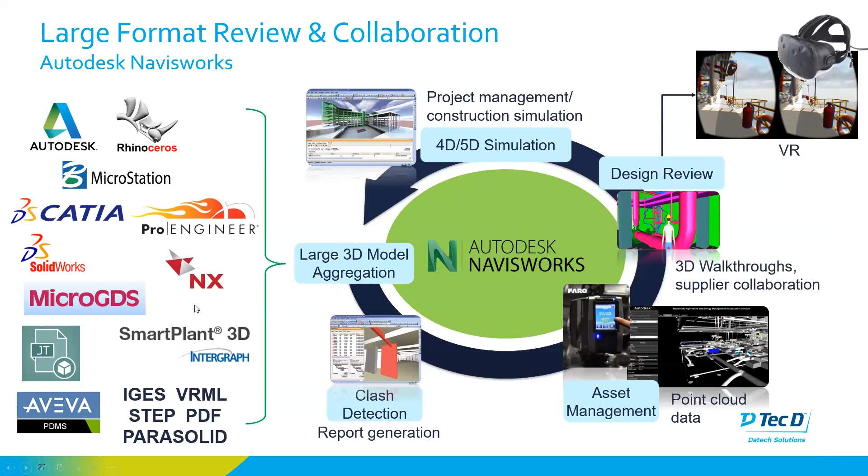So I think that's about it about Autodesk Navisworks. Autodesk Navisworks is powerful to cater for large format projects, to review, to collaborate on all the drawings. From Navisworks, you can also use a virtual reality program or application to walk through your design. You have asset management, and can export it to point cloud data. All this large 3D model aggregation can be exported into Navisworks.

All right, so this is the Autodesk Product Design Manufacturing Collection to sum up everything. In one collection we have AutoCAD, we have AutoCAD tool sets, specifically here is Plant 3D and AutoCAD PID. We have Inventor Professional, the sheet metals, and then we have Navisworks Manage and also Inventor. Sorry, in cloud we have Fusion 360 as well.

So these complete solutions available in PDMC, or Product Design Manufacturing Collection, cater to most of the industry, especially for plant design. So you have everything you need here, just the Plant 3D and P&ID, and then you need Inventor Professional and also Navisworks Manage. I think that's about it. So what are the engineering benefits? Fast track projects - does it feel like your project's behind schedule?

You need to do multiple project tasks in parallel. So how will you meet the project requirements? The specialized skills and resourcing, how can you maximize your efficiency with current staffing levels? Are your best resources retiring? Is training taking half a year?

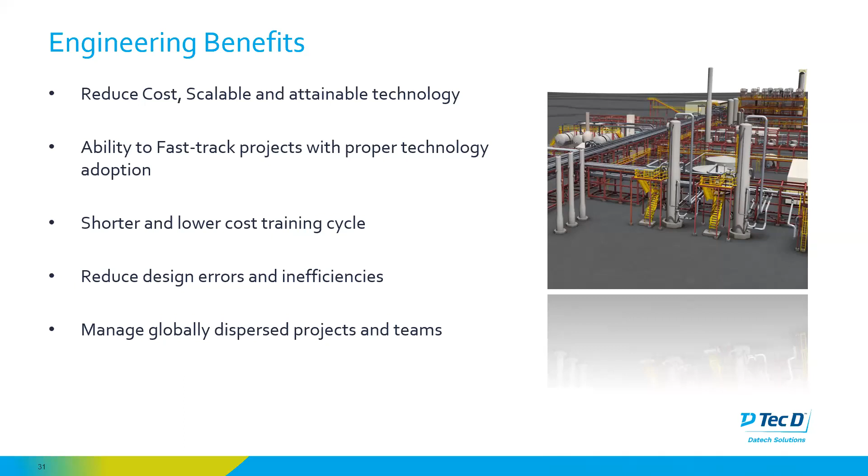This one is very easy, so you have to ask yourself, what are the benefits? Are your investments in training risky because other engineering firms will hire them once they are trained? Design errors - shorter design cycles reduce inefficiency, and also manage globally dispersed projects and teams.

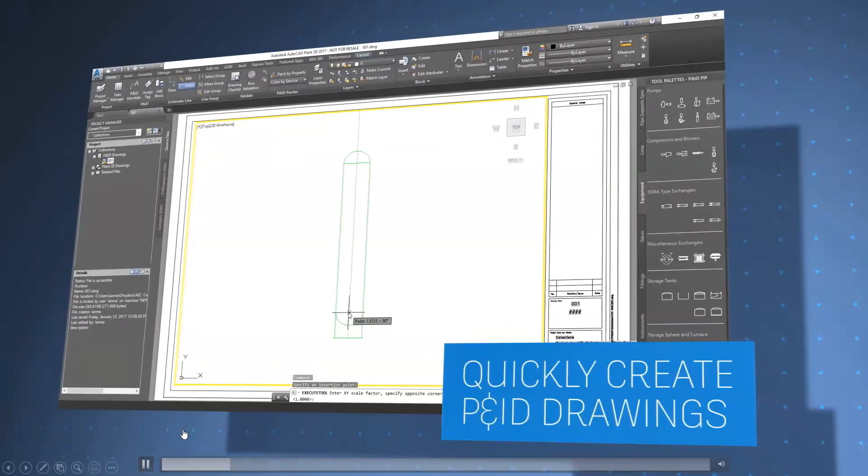Engineers and designers need to work closely together to plan, design, optimize, construct, and manage today's complex process plant. The Autodesk collection has all the tools you need to design, engineer, and construct plant projects efficiently. Starting with process design, AutoCAD Plant 3D software allows you to create intelligent piping and instrumentation diagrams quickly and easily. Reports are created automatically, and information stored in the PID is connected to the 3D model for quick validation between the process design and the 3D plant design.

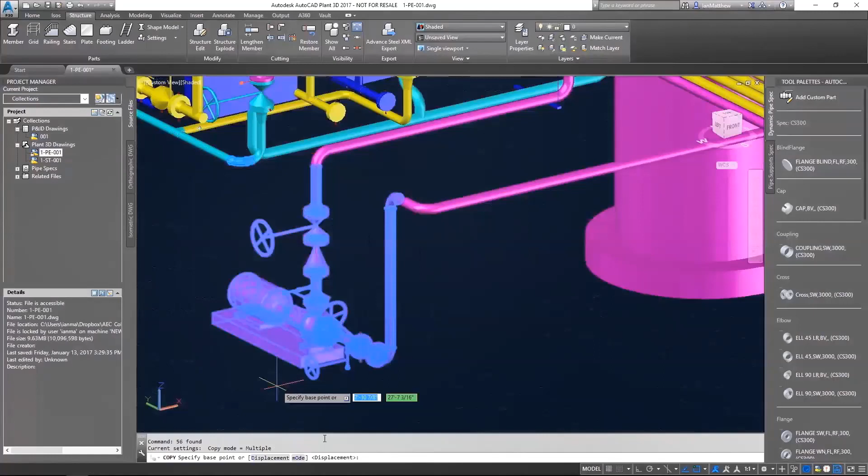With AutoCAD Plant 3D, you can continue with the design and layout of the process plant. Piping designers, structural designers, and mechanical engineers work together to design the plant in 3D. Piping designers perform spec-driven design of pipe layout. Structural designers access built-in libraries of steel sections to perform accurate structural design. The modeling tools in Plant 3D allow teams of piping designers to quickly lay out equipment, route pipes, and ensure connectivity. Bills of materials can be produced directly from the model at any time using Plant Report Creator.

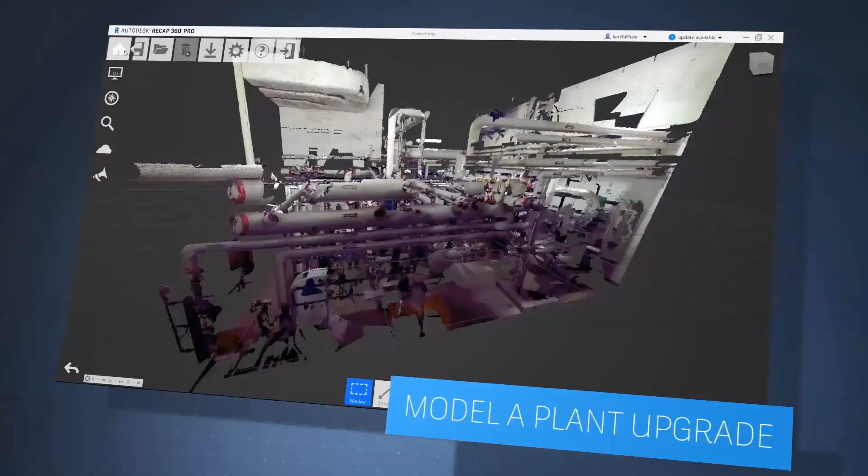For designers performing retrofit design on existing plant facilities, Recap 360 allows engineers to bring point clouds into the Plant 3D model, allowing fast and accurate remodeling of plant facilities. For the design and layout of ductwork and cable trays, AutoCAD MEP integrates directly with the Plant 3D model.

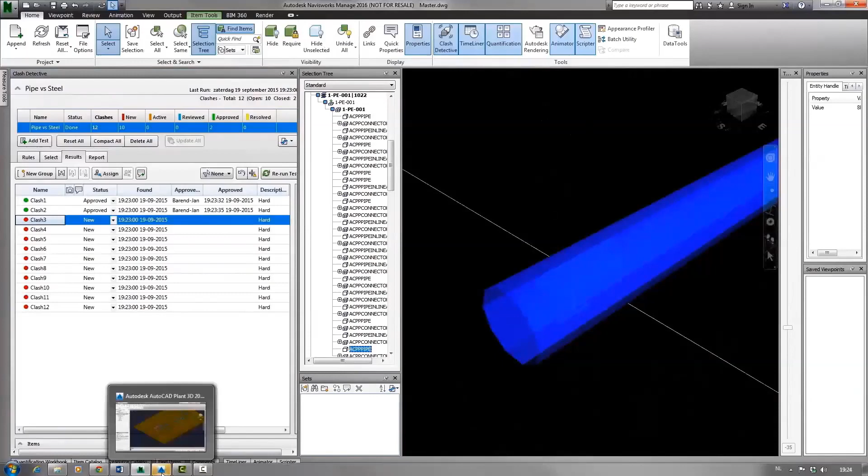As the design progresses, design teams need to review the fully integrated model and check for physical interferences, as well as soft clashes, such as clear access to valve operators and safety equipment. Navisworks Manage allows the project team to collaborate closely and identify these clashes to determine resolution.

At any time, reports and drawings, such as general arrangement drawings and piping orthographic drawings, can be created directly from the model. These drawings are easily updated during the design of the plant. And because the piping is all driven by piping specifications, accurate annotations and bills of materials can be produced at any time.

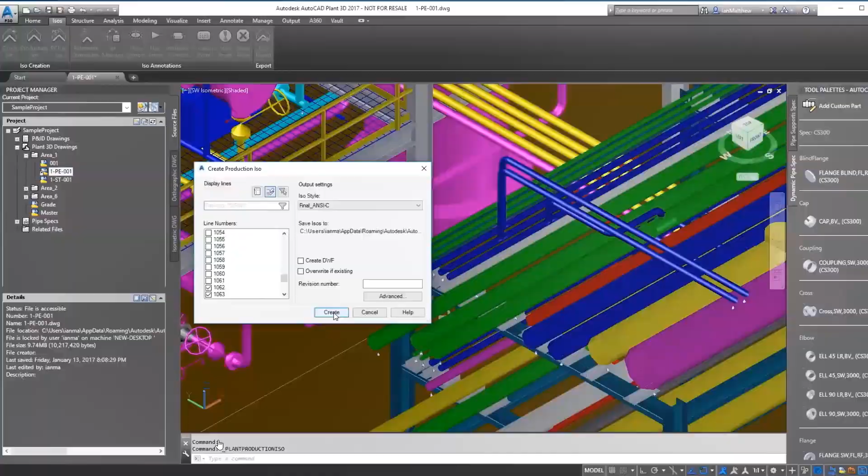Piping isometrics are created directly from the plant model. AutoCAD Plant 3D includes the isometric drawing software for the creation of piping fabrication isometrics and for piping erection isometrics for plant construction.

Planning for construction can be performed in Navisworks. Using the model generated in Plant 3D, planners can start to plan the construction sequencing and develop a construction plan. By using the visualization tools, planners can check the validity of the scheduling and track the construction progress. Costs can also be assigned to the tasks to track costs throughout the project.

Okay, so I think that's about it. I'm sorry that I was busy presenting. But you think we can move on to the Q&A? Then we address the current ones in the chat first, quite a bit. Yes, I was reading the chat just now. So I just realized that there's a lot of questions. I want to start from the top.

I think Gabriel asked, when you were doing the tagging, is the change in data automatically reflected in all drawings documents? I.e., is it based on a single source of truth database? He was asking. Hold on, I'm scrolling, or I'll let you organize how you want to.

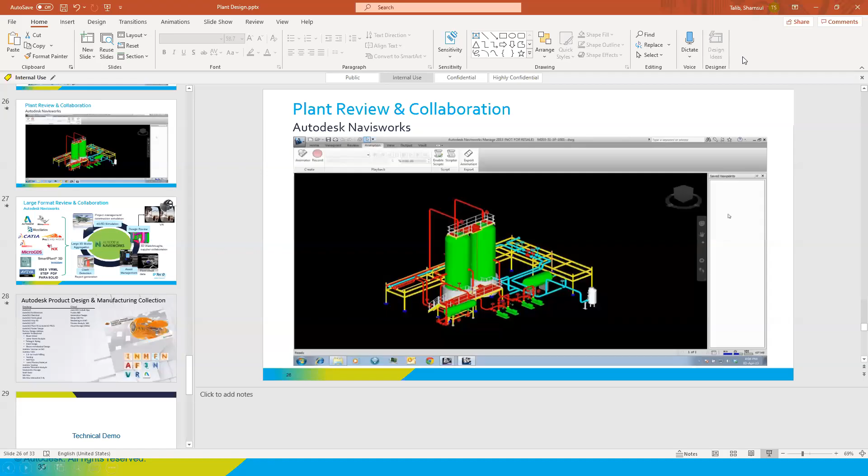Yeah, thanks. So this is based on a single source of truth database. So in Plant 3D and P&ID, everything is actually compiled in one folder. So it's not single source of truth like in the cloud, but all the projects that are created - for example, I'm showing you the P&ID here. Let's say I'm going to create a new project. All the projects inside here, the directory, all the drawings will be stored in this folder, whichever one you select.

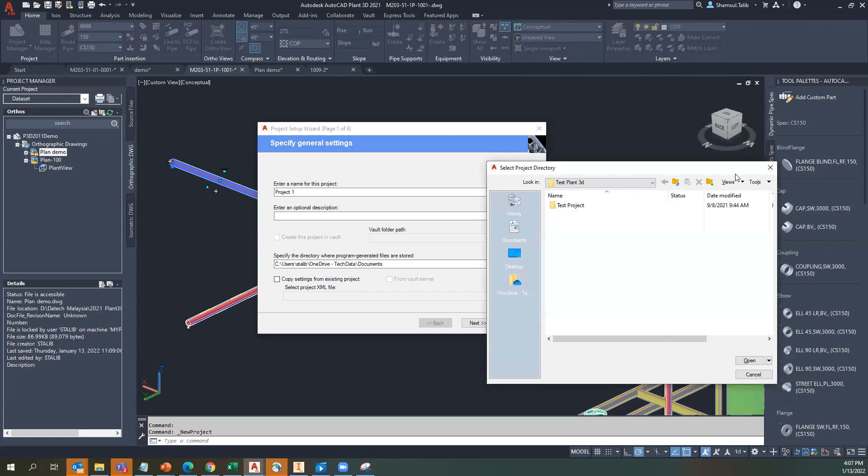So this can be, say, a single source of truth, but in your machine only, not in the cloud. But of course, Plant 3D can also work with Autodesk BIM Collaborate Pro, where you use the single source of truth in BIM Collaborate Pro with Autodesk Docs. I hope this answers your question. So everything is stored in the same folder.

Okay, and also you can save it in the cloud as well.

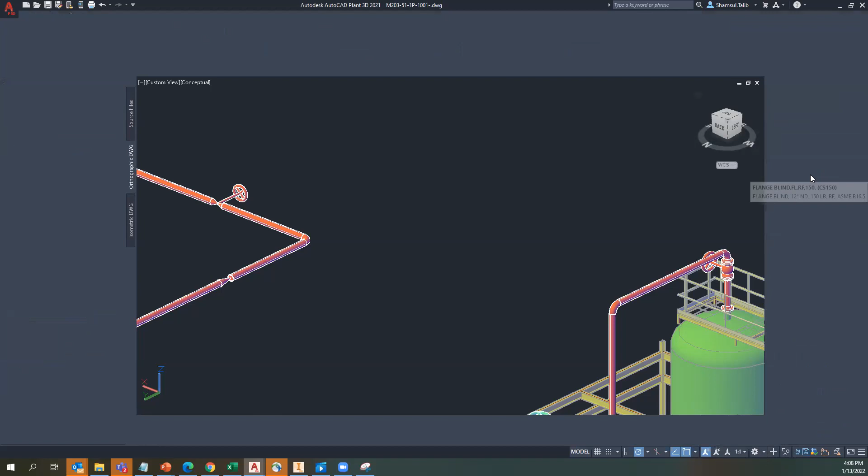Next question: the symbols in Plant 3D are very generic, and we would like to add more data like an IO list. The symbols in Plant 3D and P&ID are fully customizable. You can create a symbol here and assign it as the equipment or parts you want. Let's say there's no your type of pump in P&ID - you can always edit and assign it as your pump. You can add a table here, or create a separate tool palette tab for your own parts.

Next question: can you share how you modify the sizes of tanks so quickly? That's actually a feature in Inventor called iLogic. It allows quick changes to the equipment or design, but of course you need some configuration for it. If you want to see a demo about it, maybe we can do a separate session, because it takes quite some time.

The industry is working much closer with stakeholders for data standards - is AutoCAD implementing an open data standard which allows sharing of data? This one I have to check and get back to you, Mr. Gabriel. Marcus will keep in touch with you about this question. Took down that note, ready for that.

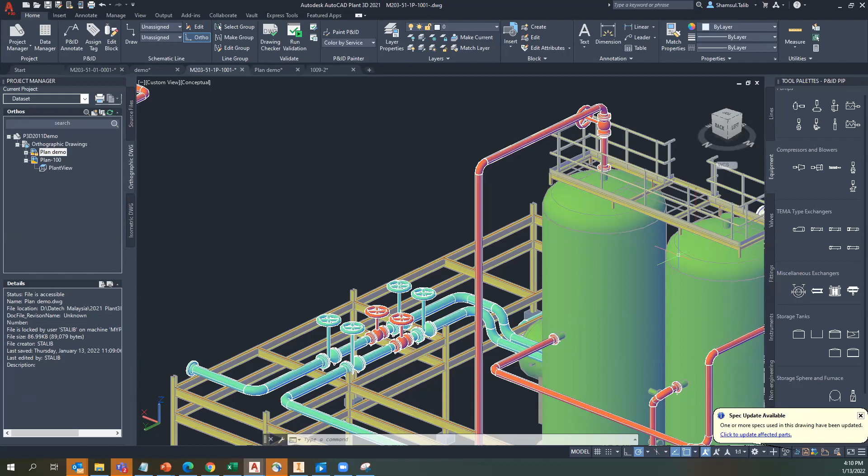So guys, I think that's about it. Can you show tagging? I think there's one more question on the slopes - creating piping, the slope. How to create a slope?

So the slope, for example, this pipe - if you see on the properties, you can immediately change the slope by changing the properties only. There's port properties, pipe properties - there's a way to do it because of centerline, top of pipe. So the slope can be changed from the properties only, just by changing the height. There's a piping option, a few options here that you can change to change the slope, but it's doable. I'm sorry I forgot exactly how, but I remember I did it before - it's like changing the height of the pipe, the start height and the end height.